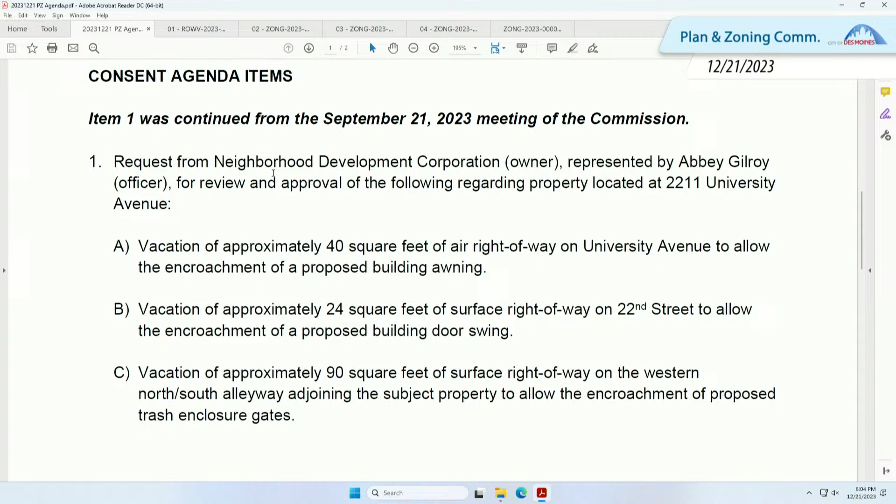Vacation of approximately 40 square feet of air right-of-way on University Avenue to allow the encroachment of a proposed building awning. Vacation of approximately 24 square feet of surface right-of-way on 22nd Street to allow the encroachment of a proposed building door swing. Vacation of approximately 90 square feet of surface right-of-way on the western north-south alleyway adjoining the subject property to allow the encroachment of proposed trash enclosure gates. And vacation of approximately 1,761 square feet of subsurface right-of-way on 22nd Street, University Avenue, and the adjoining western north-south alleyway to allow the encroachment of proposed building footings.

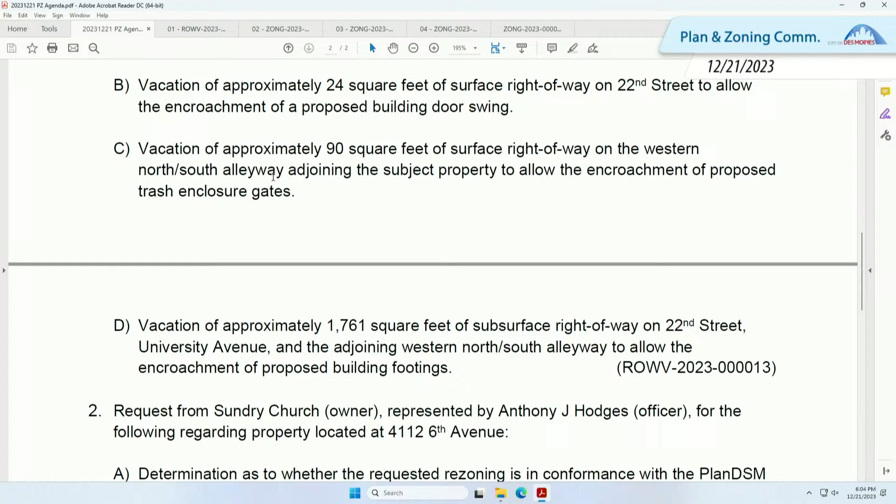Is there anyone in the audience tonight who would like this item moved to the public hearing? Are there any commissioners who would like this item moved to the public hearing? Okay, seeing none, item number 1 will remain on the consent agenda.

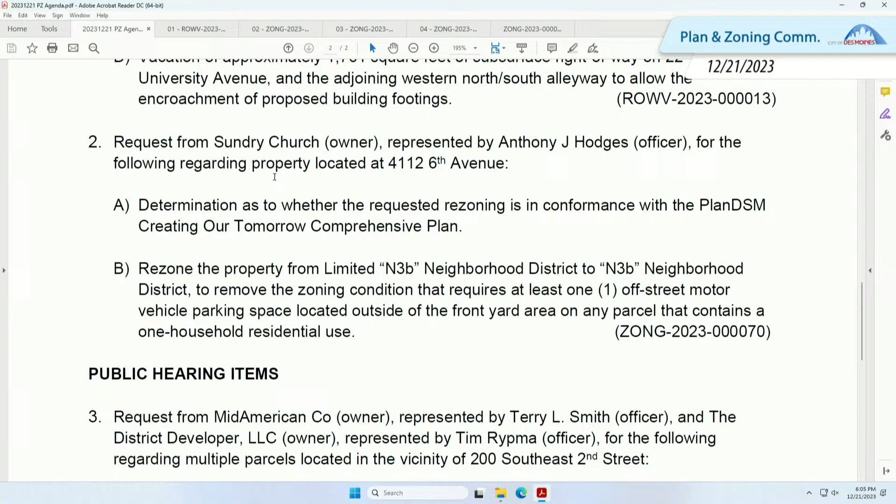Item number 2, a request from Sundry Church for the following regarding property located at 4112 6th Avenue. Determination as to whether the requested rezoning is in conformance with Plan DSM, to rezone the property from limited N3B Neighborhood District to N3B Neighborhood District, to remove the zoning condition that requires at least one off-street motor vehicle parking space located outside of the front yard area on any parcel that contains a one household residential use.

Is there anyone in the audience tonight who would like this item moved to the public hearing? Is there a commissioner here tonight who would like this item moved to the public hearing? Okay, seeing none, item number 2 will remain on the consent agenda.

Item number 3 can be moved to the consent agenda. Staff is okay with that. However, they would like the commission to know if they want to hear it as an informational item, we can keep it on the public hearing. So are there any commissioners who would like to hear it tonight in the public hearing? Item number 3 - I didn't read it yet, I'm sorry.

It's a request from MidAmerican and the District Developer LLC for the following regarding multiple parcels located in the vicinity of 200 Southeast 2nd Street. Determination as to whether the requested rezoning is in conformance with Plan DSM, to amend Plan DSM to revise the future land use classification of the property from downtown mixed use to public semi-public, amend the large-scale development plan for the Market District area to revise the area designated for a park and associated amenities, and to rezone the property from limited DXR and limited DX1 downtown districts to P2 public civic and institutional districts to allow the development of the space for a park and an accessory surface parking area.

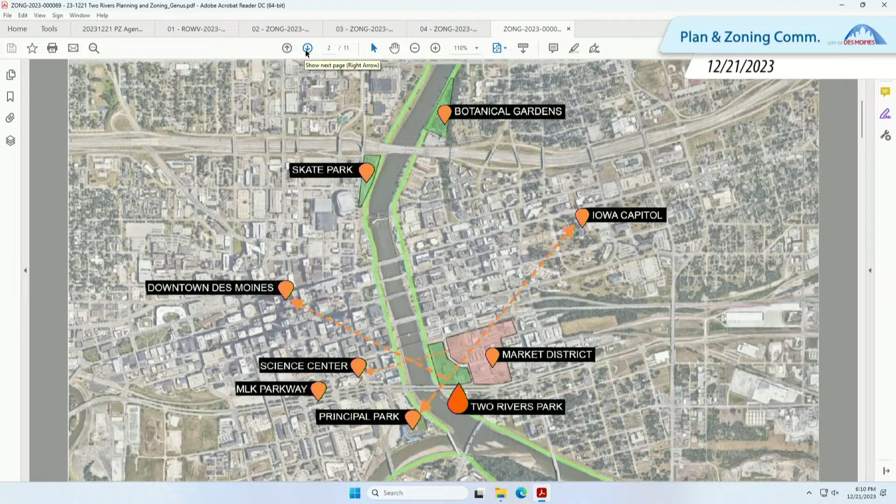So let me advance here. As you all know, it's a prime location within the city. There's a lot of opportunities for connection to the bike trails, to the future market district, to the many amenities we have around the city, and we anticipate this is going to draw a lot of people to it.

And at the same time, we wanted to enhance those connections to the city by providing views from this park out to the city, to downtown Des Moines, to the Capitol, to Principal Park.

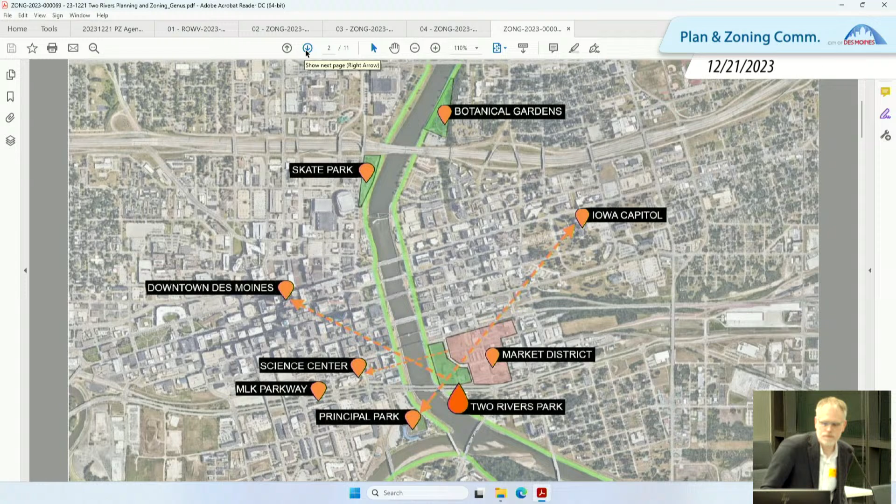This was here for reference in case we needed it based on the discussion tonight. We can go back to this for the zoning diagram if we need to.

But as far as enhancing connection to the city, just would share with the group, for instance, that we've been working with the Harkin Institute. We've been engaged in focus groups, 6 focus groups with over 44 participants, to really understand what it means to have a park that's highly accessible for all people. Some of those conversations have focused around how people get to the park, how they enter the park.

Just as far as the orientation of the park, obviously north is to the right in this diagram here, but we have the bike trail that exists, and there are multiple connection points to that bike trail. There's also major pedestrian access points at the northwest corner and off of Market Street, which is planned to be a major public street within the city.

And a place for festivals and events. And so we anticipate the park will also accommodate that and coordinate with that in terms of the flow of people through it. There's a couple other points of access there, the existing crosswalk, and some points near the parking lot.

So that parking lot is down at the southeast corner there. It has spaces for about 60 cars. It has multiple accessible spaces and also is designed to capture stormwater.

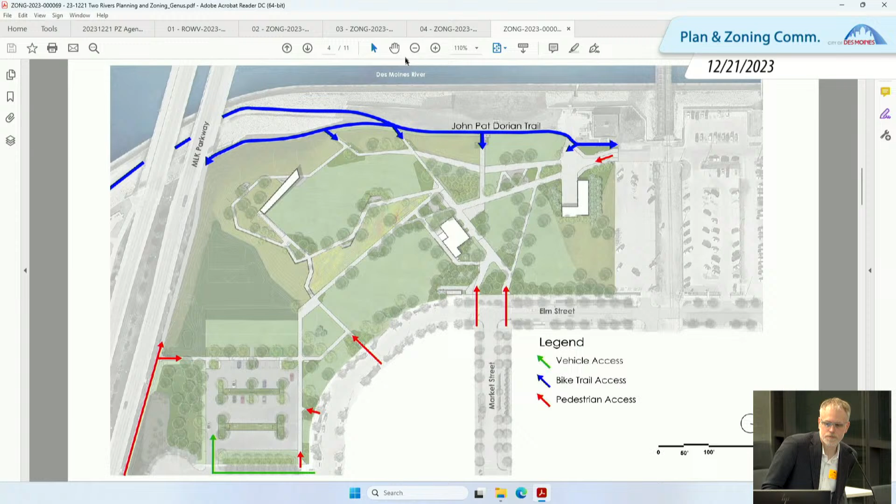There's a few main structures on the site. Item number 4 is the DNAPL building, which is the building that houses some of the below-grade remediation systems that are necessary for the site. So that will be owned and operated by MidAmerican, but then also within that building are facilities for Polk County Conservation. They will be maintaining the park, so we have some space in there for their maintenance equipment.

The main public building on the site is the shade, shelter, and restroom building, and it's about 1,800 square feet of shade shelter along with 4 single-user, gender-neutral, all accessible restrooms.

Then the other structure on the site is the overlook. So if you've driven by the site, you'll notice there's a large hill there now. The overlook will spring from that hill, and it will extend toward the river and towards downtown as an amenity and a gathering place for people.

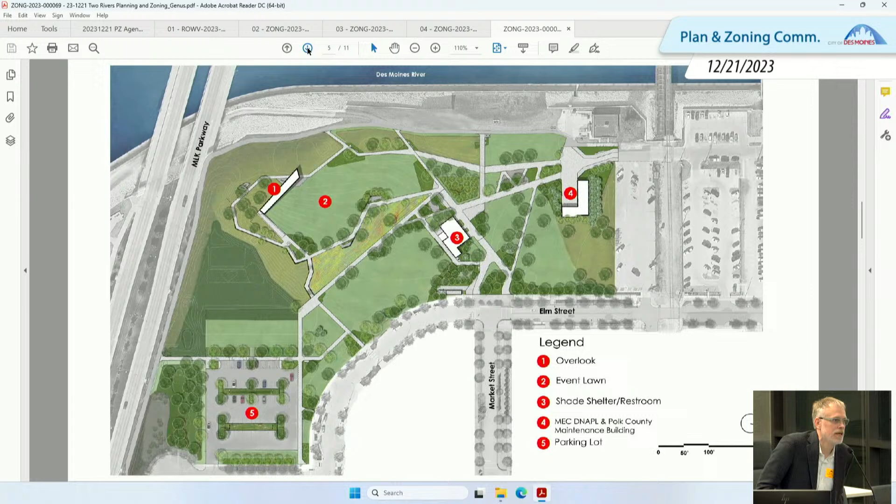One of the main things we're doing is ensuring that we really have an accessible pathway all the way up to the end of that overlook. So while that overlook will be 18 feet above kind of the central grade at the park, it's about 520 feet of travel distance, so the grades will be around 3% on average. So it will definitely be accessible getting up to that point, and providing multiple places for people to stop, shade, seating, to provide some different events and viewing opportunities along the way.

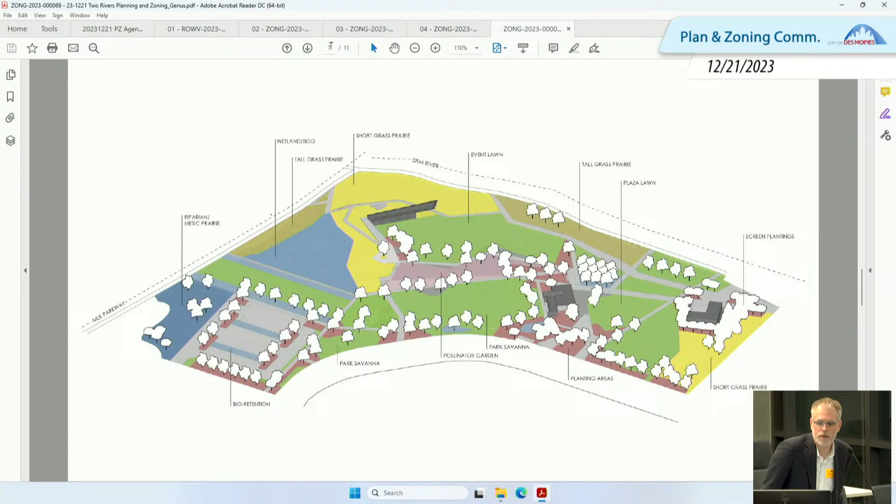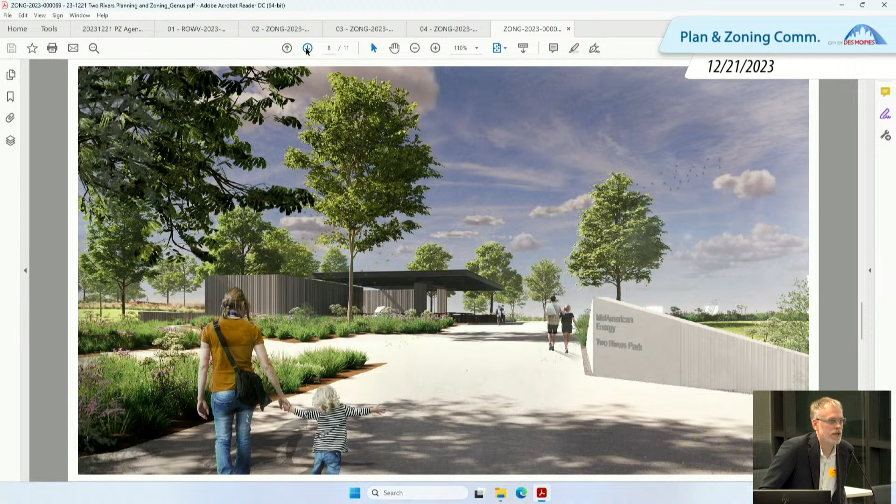Just some images of the experience here. This is entering from the market district, with the shade shelter beyond to draw you in to the park. As you get further in, the river would be on your right, the overlook beyond, and the path that extends gently up through the landscape to the end of that overlook, with the lawn in the foreground.

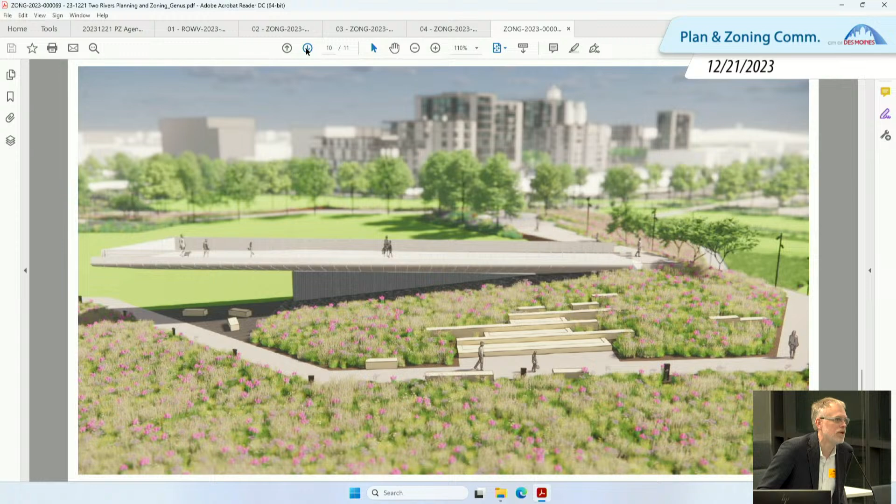In a bird's eye view, the cantilever is a major aspect of it. It's dynamic, but also has a functional component, providing shade below it. When we don't have trees as developed on the site, shade will be a really important amenity, and it connects to the path that loops around it to the south. Finally, a view adjacent to and looking toward the overlook, oriented towards downtown, gives the ability to look at the river and downtown, perhaps see events on the lawn to the right, and experience the prairie landscape from a different perspective on the left.

We're very cognizant of safety within the park and trying to encourage specific uses and discourage other uses. For instance, under the overlook, having things like riprap there will discourage people from gathering underneath. Lighting will be an important component of the park—we've done a lighting study and photometrics of the entire site, which will really promote and enhance security on the site.

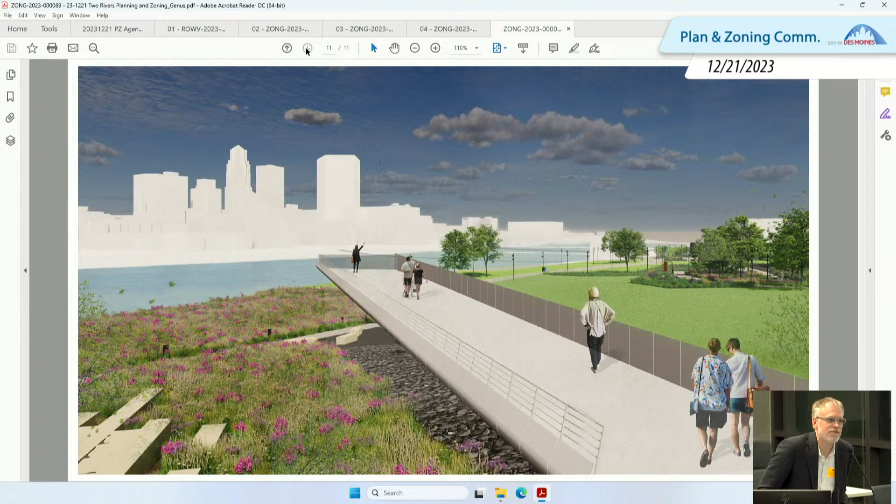So that's what we have tonight to present. Happy to take any questions, and if I can't answer them, perhaps Brett Douglas from Genus can.

Any questions? Your parking question was resolved? Okay. Any questions from the side? No? I just have one question.

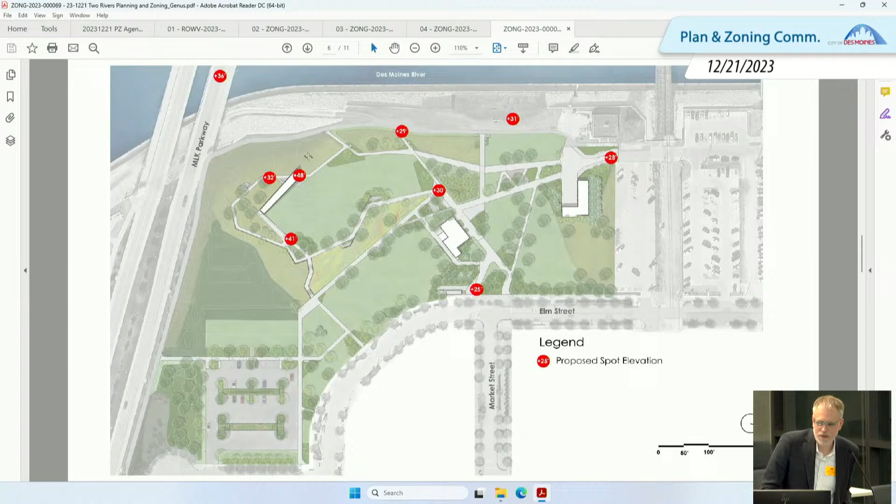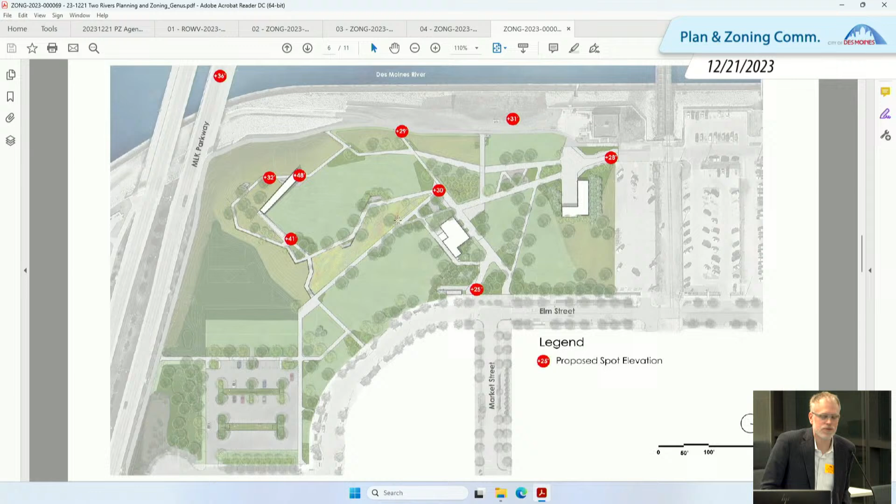This is on the bike trail—can you possibly point out where the bike racks are? I'm not sure we have them identified on these plans. There will be bike racks throughout the site, and we do have a plan in development. We're in design development, so we have a technical drawing that has those on it. There are a number of them close to the bike path in these areas, and some closer to the shelter. We're still fine-tuning where those are.

Okay, great. Any other questions or comments? All right, thank you very much. Okay, thank you.